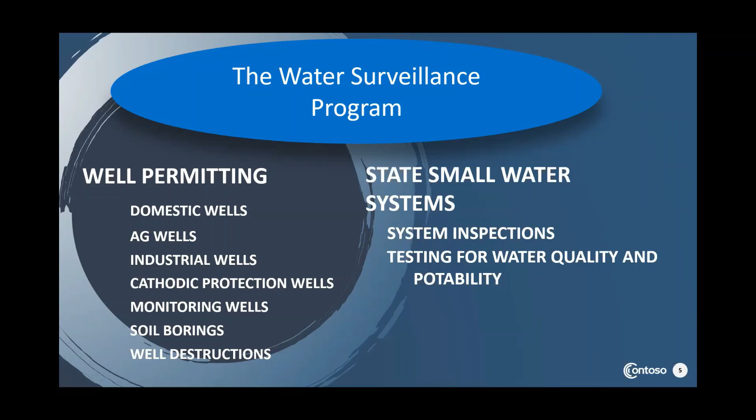So that's a quick look at what we do with environmental health and the water surveillance program. But we're going to go ahead and move along to what we are here for, and talk about well destructions. In the news you're always hearing about new wells being drilled and well constructions, but a very important part of taking care of the environment is the well destructions. So we're going to talk about that.

What is a well destruction? A bit of a definition there. Simple: it's the process used to permanently close a well. It's no longer going to be used. You can't just bury it or ignore it. It needs to be permanently closed, so it can no longer be used.

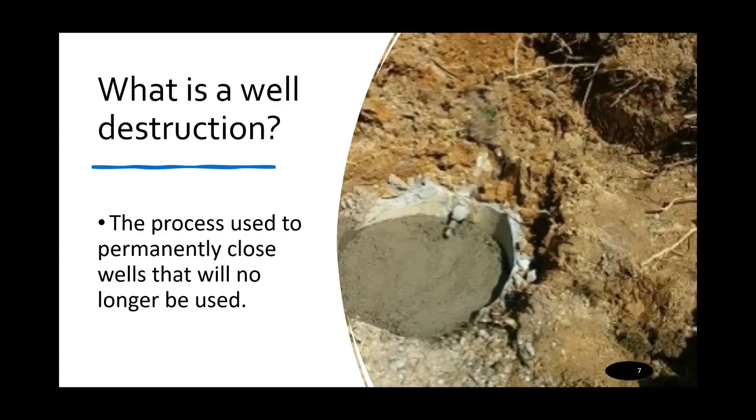Some of the common reasons we come across for people needing to destroy a well: wells failed to provide safe and healthy water. This can happen, for instance, in certain areas where a water test is done and there are certain chemicals that really can't be safely removed from the water. For instance, there are certain wells that are showing up positive for dibromochloropropane, DBCP, which is very dangerous to human health. You can't even use that water to shower. You just shouldn't have that water in your home at all. So a well that shows up with that needs to be destroyed, because that water is literally poison.

Sometimes wells are destroyed because the well doesn't produce enough, or it goes dry, and we're seeing a lot of that. As our aquifer is kind of drying up and the water levels are going lower, a lot of the wells, especially domestic wells, are going dry. So a well doesn't produce enough, it goes dry, it's not needed anymore. That well does need to be destroyed properly.

The well's no longer needed. Maybe it's still producing, but they have a better producing well, or maybe they've decided that they just don't need to use much water. They need to destroy it properly. Sometimes the property where the well is found is being repurposed.

That happens, for instance, where a place a house used to be is now going to be used as a place to park semi-trucks, something like that. So then they need to destroy the well. A lot of wells had to get destroyed when the high-speed rail came through. The property is being repurposed, the well is no longer needed, and it needs to be destroyed properly. Also, as certain municipalities start to grow, they can provide water to people, so the people no longer need to have a well to do that.

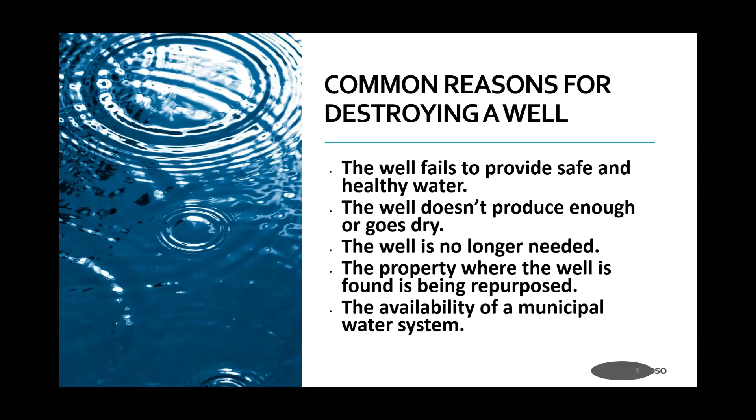This is what the California State Water Well Standard says to us about wells that need to be destroyed: a well that is no longer useful must be destroyed. So it is a mandate that comes from the state, and it covers all wells. Any perforation into the ground that goes deep enough really needs to be destroyed properly when it's no longer useful.

So, residential, agriculture, industrial wells, even exploratory and test wells or soil borings. I was on a place the other day where they were doing a series of soil borings - 13 different ones. You can see in this picture this fellow doing a boring into the soil - they go down and take a sample to try to find out what possible contamination could be there, or to find out the soil structure. When they do that hole, we require them to destroy it properly, and we're going to go over the reasons why. But any well that is no longer useful needs to be and must be destroyed.

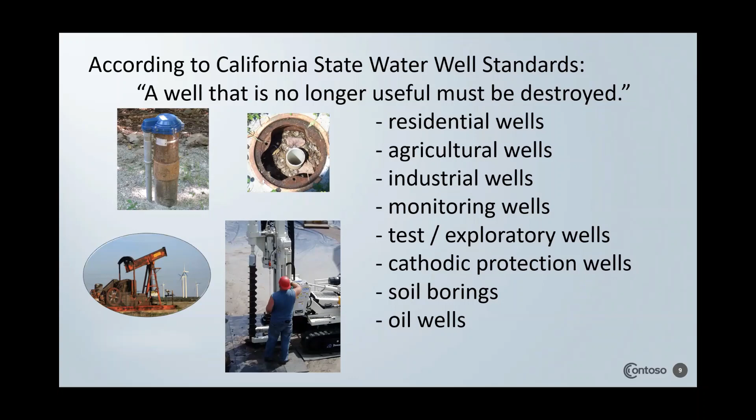That's part of our education efforts, to help people understand that it's not an option. It's not 'this is a nice thing to do, please destroy the well' or 'it doesn't look nice, we need to get rid of it.' No, it's a requirement of the state. A well that is no longer useful really does need to be destroyed.

I'm going to go over really quick a couple of different benefits to properly destroying a well. The big one here is safety for people. Each of these wells I have a picture of, these are wells that people fell down. This first one right here was a 50-foot deep well, and a 35-year-old woman fell down it. She survived - they were able to get her out. Over here, we have a well 60-foot deep, and a 7-year-old boy fell down that. After a lot of work and many hours underneath, he was able to be saved.

Over here, we have a well that people didn't even know about. A 6-year-old was out wandering through the yard and ended up falling down this 35-foot well. He also survived. What I'm not including here are the people that did not survive, because there are quite a number as well of people that have fallen down, especially children that are out wandering, who come across an open well, fall down, and are not able to be rescued.

For landowners and farmers especially, this word is very important: liability. Because in these cases, when there's an open well that hasn't properly been destroyed, and the state has said an unused well needs to be properly destroyed, if they don't do it and someone falls down there, that landowner is liable. So it's very important that people understand, if there is an open well on their property, they need to take care of that, because it is very dangerous.

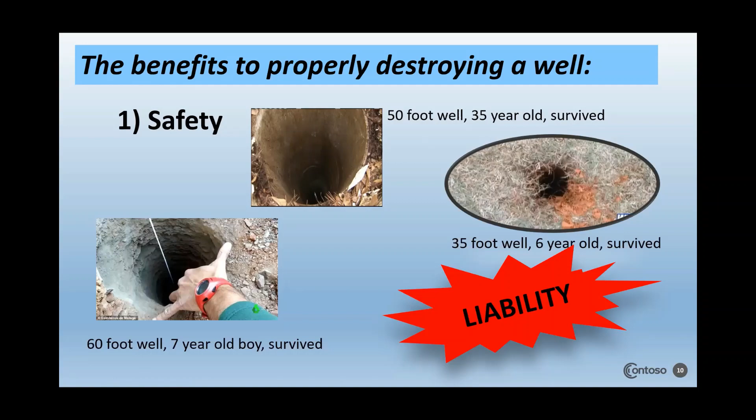Another huge thing is the protection of your water supply. The way I think about wells is kind of like the earth is our skin. When our skin is broken, so we have an injury or something, the skin up to that point is protecting us really good from all the bacteria. But as soon as the skin's broken, that bacteria pours into our body and we get infections, unless we clean it out properly and seal up the skin. Well, it's the same thing with the well.

The surface of the earth is like a skin. And when perforation is made in the well, or in the skin I should say, like drilling a well or digging or whatever, then contaminants that are on the surface can easily get down into the water.

I'm sure all of you are familiar with the idea of an aquifer, and how underneath this there are different collections of water and lakes and rivers and puddles and streams all deep underground. This aquifer is shared by everyone in the neighborhood. And if someone has a well that is not being used, that is allowing contamination to enter into it, that contamination is going to go down to the aquifer.

And the aquifer isn't just sitting there. In most cases, the aquifer is moving. In some places, the movement is very slow, years and years, slow migration of water. In other places, it's very fast. So any contamination that goes down into the aquifer is going to get shared around to the whole neighborhood.

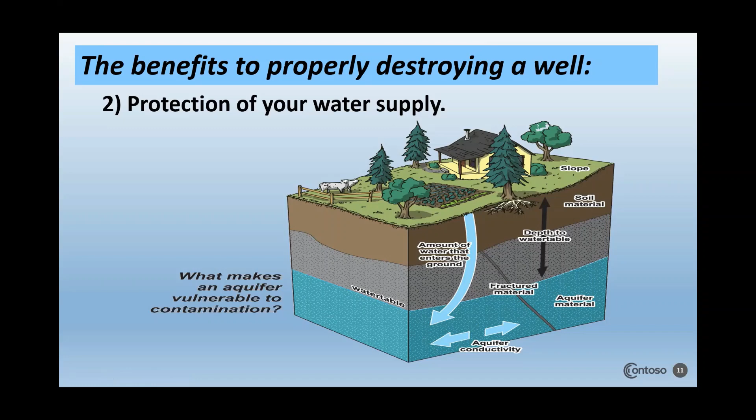Here's a picture. This was a drawing taken from Florida, talking about the different contamination sources for the water supply, especially in these big cities. That's just an illustration. You can see anytime there's a perforation of the earth, that means anything that's on the surface can easily go down those holes.

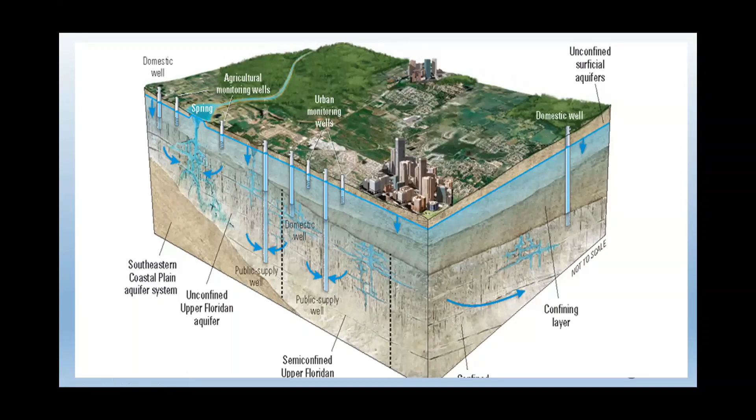And when they go down those holes, they can contaminate everyone's water. So someone over here has a well that hasn't been properly destroyed. It's a big open hole, and some nasty stuff gets down into that. Well, guess what? People around that are sucking the water out of a common source are going to start getting that nasty stuff. So it's very important for us to understand that we need to protect the water supply by making sure that any wells that are out there that are not in use are destroyed properly to prevent anything from the surface getting down into the water supply.

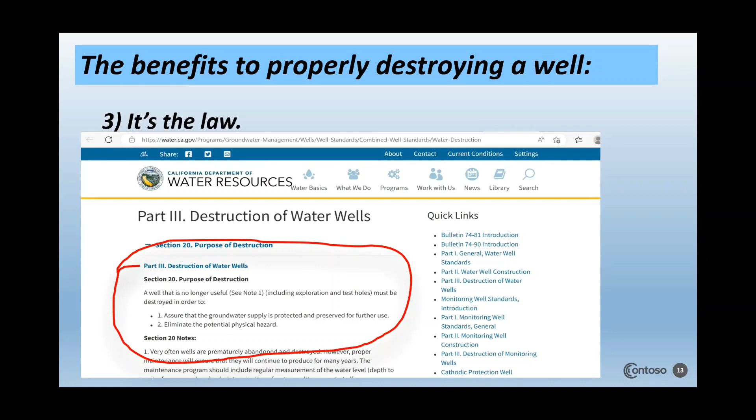So I'm going to go really quickly. What are the requirements to properly destroy a well? There are some things you need to understand. An individual out there that just finds a well and wants to fill it in, it can't be done that way. The person needs to be using a licensed contractor, and there's a very specific license called the C57 Well Drilling Contractor's License. People will present themselves saying they can destroy wells, no problem.

You need to make sure that individual has the proper licensing, because these people are trained and highly experienced on how to drill wells and how to destroy wells properly. They know the standards, they have the right equipment, and they can and will do it properly.

That contractor then needs to get a well destruction permit from the county. This is part of something really important that we do, the permitting process. It's very important that before a well contractor does a well destruction, or even well construction, that contractor needs to get a permit from us.

Please understand, this is part of our effort to protect the water. We need to make sure things are done properly. A well can be destroyed in a very improper way that sets up all kinds of problems in the future to our water supply. We need to make sure it's destroyed properly.

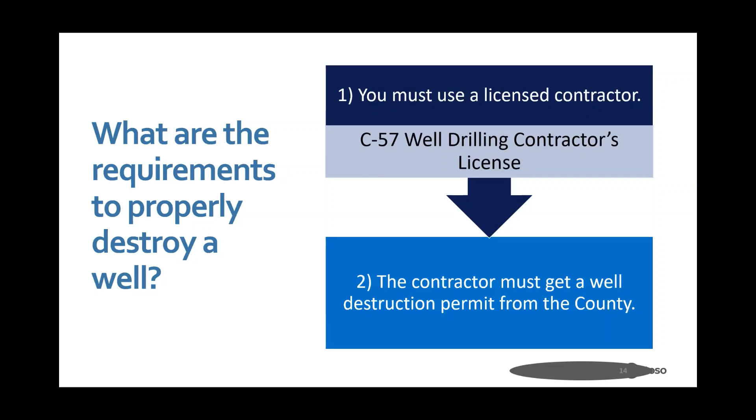Who applies for the permit? The contractor is the one that applies for that permit. This is an example of a permit that we have here. You need to get a permit from environmental health. Who applies for the permit? The contractor does.

What does a destruction permit cost? A permit to destroy a well at this time costs $518. So you find a C57 contractor, and the contractor is the one that will talk with you and figure out exactly the plan, come up with a plan, and then that contractor files with us his plan. We do the research, and then the permit is given to the contractor, and the contractor will do the destruction.

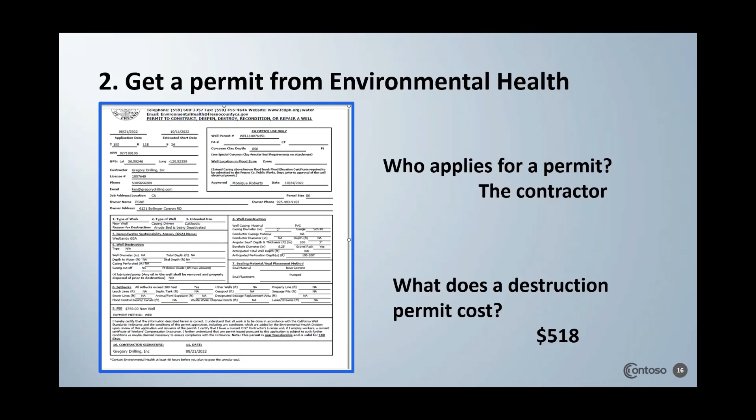Before a well can be properly destroyed, we have to remove from that well anything that could obstruct it, anything that could cause problems. Maybe it's an old well with some old plumbing going down into it. Quite often, these smaller wells will have a submerged pump in it. All of that plumbing and pipes, the pump, the wiring, all of that has to be removed from the well. Something else that happens, especially in these large ag wells, especially the older style ones where they had a motor or engine on top.

They would have some lubricants up top that automatically feed the motor or engine. More often than not, as it gets used, the seals get worn, and some of that lubricant will go down into the well. So in some of these old ag wells, you can find 4, 5, 6 feet of oil sitting on top of the water. Well, that oil is a hazardous material, and so it has to be removed as well before the well can be properly destroyed.

So that's part of what the contractor needs to do. The contractor will come in and prepare the well site for destruction. Part of that is removing anything out of that well, anything out of that hole that could possibly cause a problem during the destruction of the well.

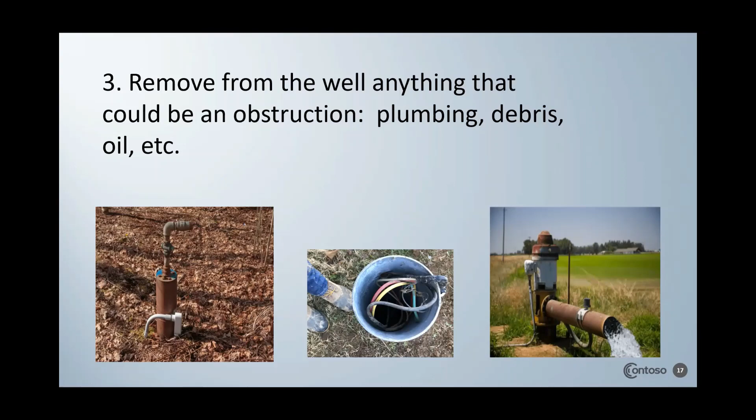After that stuff has been removed, then the contractor will need to excavate, will need to dig out around the old well casing. When possible, and later I'll explain why sometimes it's not possible, we ask them to excavate around the casing of the well to be abandoned and cut it off about 6 feet, doesn't have to be exact, but about 6 feet below the surface. It needs to be cut off.

So this is applicable in an area where you can dig out around there. Now, sometimes you can't do that without damaging structure. For instance, sometimes wells are part of a cement pad where there are other things sitting on that pad, and you can't tear apart the whole cement pad just to destroy the well. In those cases, you can destroy the well right to ground surface.

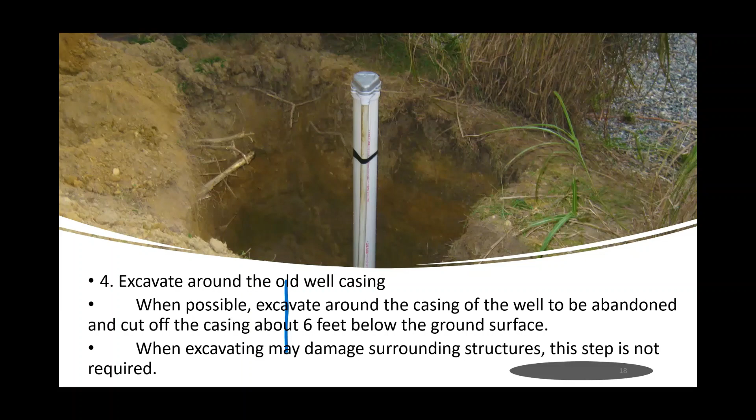The preference is that you cut it off underground, especially in agriculture areas, because in the future, who knows, maybe someday someone's going to be plowing or disking or deep ripping in an area, and you want to make sure that a destroyed well is down deep and isn't going to affect whatever you're doing on the surface. So it's much better to excavate around the casing, cut it down 6 feet below ground, and do the destruction there.

Once that's cut down like that, then that well needs to be filled up with non-organic material. That means you can't have anything that includes roots, leaves, garbage, or stuff like that. It's got to be sand, dirt, or clay—clean material without any organic stuff in it.

Something to note: wells that penetrate multiple aquifers require special destruction techniques. This is especially important in the very deep wells on the west side. There's a layer called Corcoran clay, which keeps water above it isolated, and there's a whole other aquifer below the Corcoran clay. If the well you want to destroy actually perforates that Corcoran clay level, you could end up with bad water from one aquifer mixing with good water from another and ruining the good aquifer.

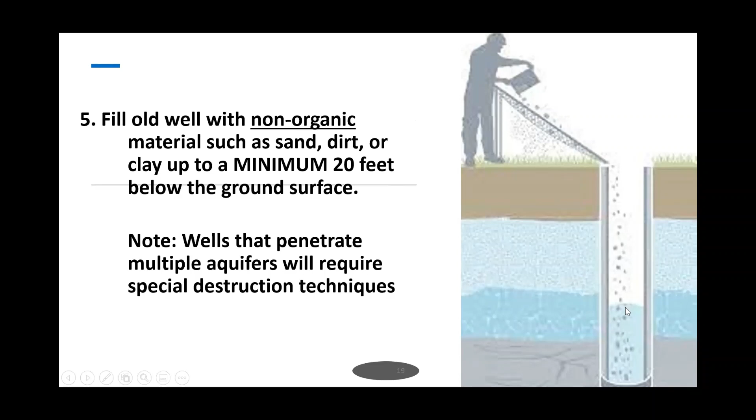But if it's just a regular well, like 99% of the wells destroyed these days, then you can go ahead and backfill it, leaving the top 20 feet or more—the more the better, like I said—empty.

Once you've done that, you install what is called the seal of the well. This is like a plug—a plug of impermeable material that fills the top 20 feet of the well, or more. This material won't allow anything from the surface to penetrate through it.

There are two different materials that can be used to properly destroy a well—has to be one or the other. The first is bentonite clay chips. You can see this gentleman pouring something called hole plug, which is the brand name, but what he's pouring in is a special kind of clay, mined mostly in Wyoming, called bentonite clay.

This clay has the property that when it gets hydrated, filled with water, it turns into a thick paste, almost like toothpaste, and it expands and swells up. So if you pour this in and it gets wet, it swells up and then dries as a really thick plug—a very appropriate, very strong seal.

Here in Fresno County, we require that bentonite be applied in chip form. In other places, you can use a liquid slurry of bentonite, but science has shown those liquid slurry seals tend to dry out and crack in an area prone to drought—and that's us, we're prone to drought. So we don't allow sealing with a bentonite slurry; you have to use the chips.

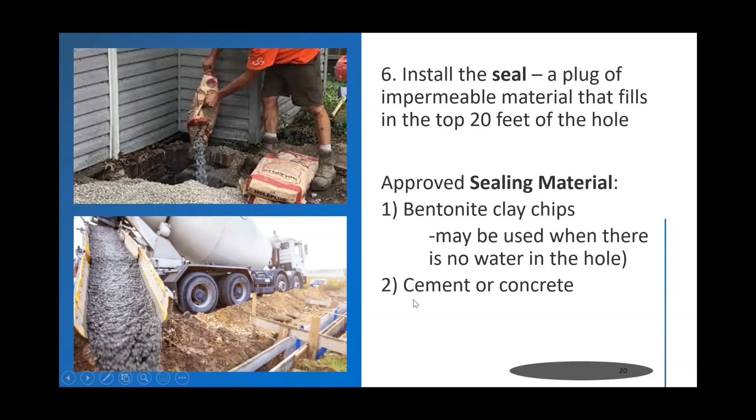Another option is to use cement or concrete. Cement or concrete can be poured down a well, and that will do the job as well.

Real quick aside about the inspection process, now that I mentioned it. To assure that the well is destroyed in a way that protects the aquifer, an inspector from environmental health has to be out there. We have to be on hand when the seal is placed. It's not a matter of going in after it's been placed to look at it and say, yeah, it's been placed. We actually need to witness the seal being placed. That's how we make sure it's sealed deep enough and sealed in a proper way that really protects the aquifer.

If we come across a place that's already been sealed, we have no idea how deep it is, how deep down the material has been put, or whether it's been done properly. So a contractor needs to set up an appointment with us to have an inspector come out.

So contractors need to plan things out, and they'll know a couple of days beforehand where they're going to be and when they're going to be ready. They call us up and say, hey, I want to do a seal of my well on Thursday at 3 p.m., and 99% of the time we'll say, sounds good, we'll be there. If all the inspectors are busy, we'll say, could you do it an hour earlier or later? But we'll have someone out there to observe and see that the well seal has been put in properly.

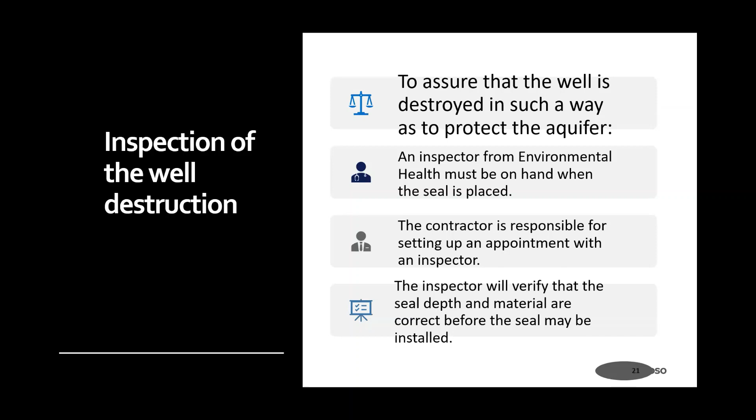So the inspector goes out there to verify the depth of the seal and verify that the material is correct, so that the seal can be installed. Once the inspector has done that, the contractor can go ahead and install the seal.

So there were two options for materials you can use to destroy a well. There are also different methods you can use to destroy a well. The first option is called the free fall option, and that's what we're seeing in the picture there. That's where the sealing material, whether it's cement, concrete, or bentonite chips, is just tossed down the well, poured right down the well.

This is something that can be done if two conditions are met. One is that the hole has to be less than 30 feet deep. So if you're doing a seal that's a 100-foot seal, you can't do a free fall. But if it's 30 feet or less, you can free fall your material into the well.

Another requirement is that there's no water in the well. Whether it's bentonite chips or cement, if it's being applied by the free fall method, the well cannot have standing water in it. What'll happen is the chips will bridge, clog up, and become hydrated and swell before they actually seal all the way to the bottom if exposed to water. With a concrete mix, as it settles through standing water, the cement separates out—the heavy gravel, concrete, or sand will settle to the bottom while the cement settles out on top, and you don't get a good seal.

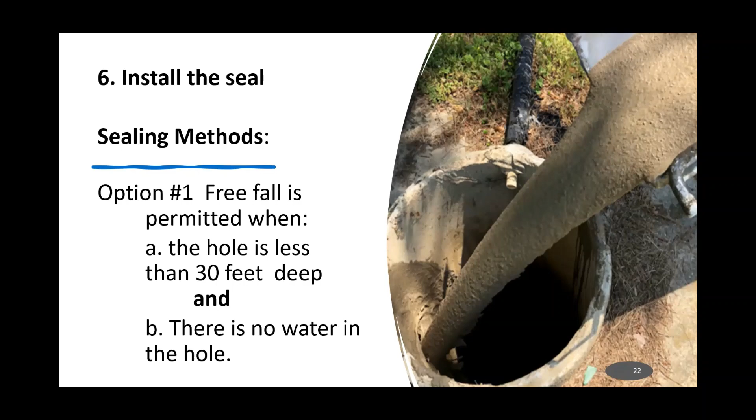However, there is another option. If they decide they want to seal a well that still has water in it, they can pump in the cement. This is not an option to use bentonite - they'll need to pump in the cement or concrete. So what they do is set up a cement pumper, and this hose, under high pressure, goes down into the well.

What's happening is that pipe going into the well goes right to the bottom, and the cement is delivered right to the bottom of the well. The material fills in from the bottom upwards, and as it comes upward, it's pushing out all the water or debris that's in there, filling it up from the bottom.

So there are two options for materials - you can use bentonite or the concrete cement mix - and two options for installing it, either free falling it or pumping it. Those are the options on how to install a proper well seal when you're destroying a well.

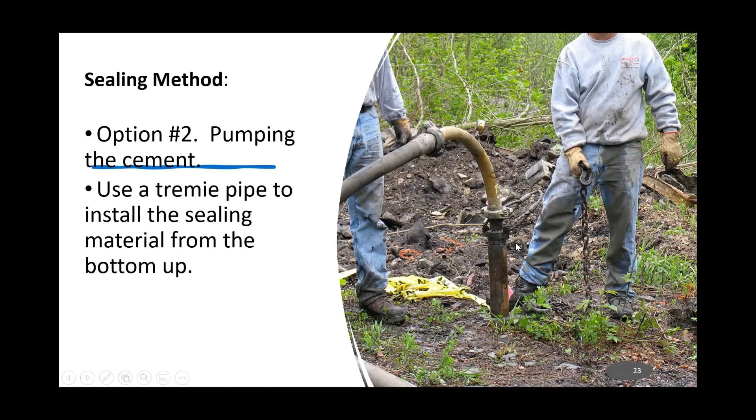That material poured in there needs to be brought up right to the very top and form a mushroom cap on top of the old casing. Here's an example of a well filled up right to the top - the top needs to be almost a foot deep, kind of like a mushroom cap going over it, so all edges around it are completely sealed. Again, the sealing material has to fill right to the top and actually up over the top, forming a mushroom cap.

If bentonite clay chips are used, before anything else happens, they need to be hydrated. You need to pour water down into there, and not just a little bit - the bentonite has to be thoroughly hydrated. You just keep pouring water, keep pouring water, until it's completely saturated.

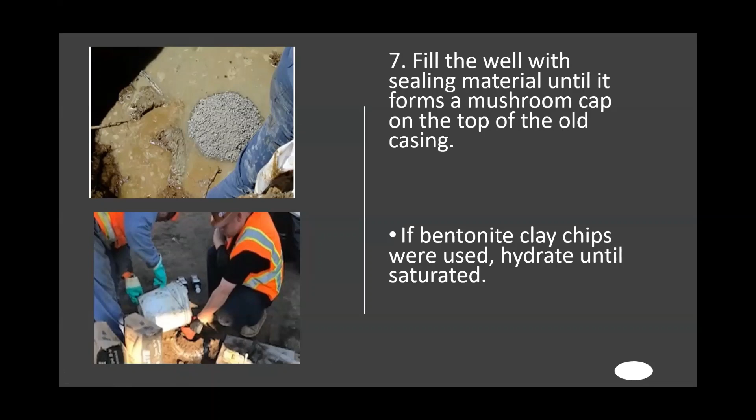Here's something that happened on Tuesday - these individuals were out there putting holes in the ground and then destroying them right away. They were using bentonite chips, and here they are hydrating them. They poured and poured and poured - I was out there watching, making sure the bentonite was completely hydrated right to the very end, because that's going to swell up.

Once that process is done and the sealing material is dried, you need to refill the excavation and return the site to its original condition. So you see this picture here - can you see where the well used to be? The answer is no, you can't.

There used to be a well right here between the rows. It was properly destroyed and the site returned to its original condition. No one knows there's an old destroyed well underneath, and it's deep enough it won't disturb the next person who wants to disc over it. That's the proper process to destroy a well. It's not difficult, but it needs to be done according to standard, because our focus is safety and protecting the water supply underneath.

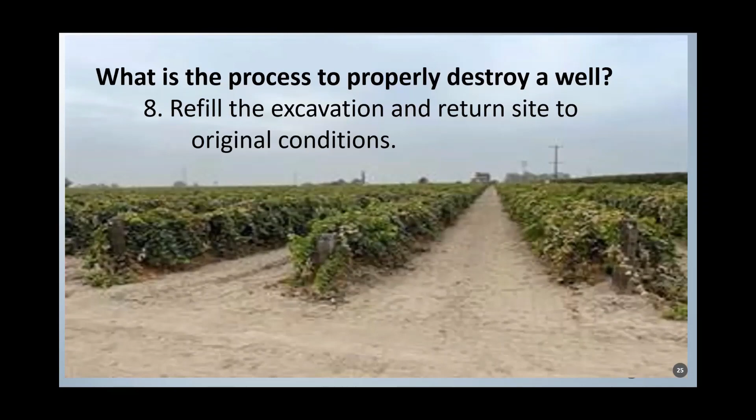Big question that comes up quite often: what if I want to keep an unused well for possible use in the future? This could be, for instance, if you still have a well and there's hope the aquifer is going to return. We're starting to hear that a lot now - people saying, look, I know the level's going to come back up. Honestly, the level might come back up over the next 100 years or so, but it's not going to be coming up very soon.

But you have the right to keep an unused well for possible use in the future. Some wells that aren't being used can be used, for instance, as monitoring wells, keeping an eye on what the water is like down there. If there's still some water in the well, they want to get samples once a year to check for contamination or check the levels. So it is possible to keep it for future use, but there are requirements to maintain an unused well.

You can't just have it sitting out there, a hole in the ground. First off, the well cannot have any defects that could affect the water quality in the well or the aquifer it penetrates. Where the top of the well comes out of the ground, it needs to be protected. It can't have cracked cement around it, or a cracked casing, or any possibility of contamination going into it. The well has to be well maintained, the wellhead there, to protect it.